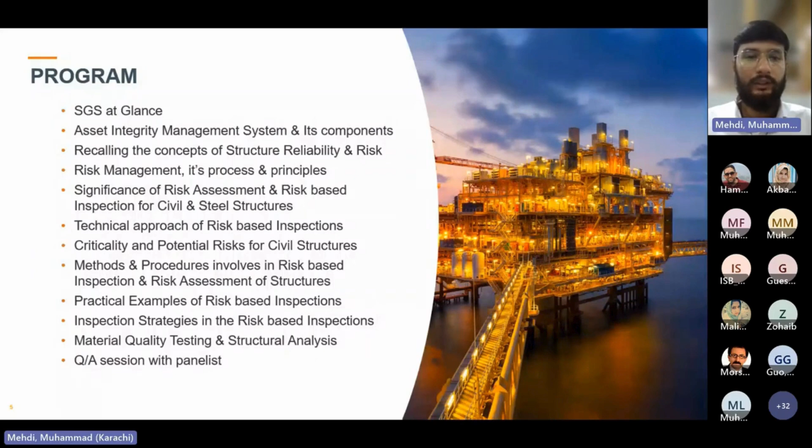and also some inspection strategies related to RBI. Then we will have a question and answer session.

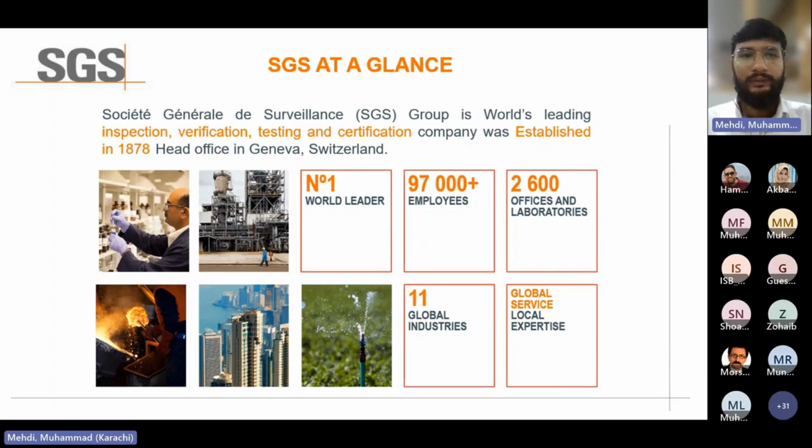Starting from SGS, I will discuss briefly: SGS is a group, and it's the world's leading inspection, verification, testing, and certification company, known as Société Générale de Surveillance. It was established in 1878 and is currently serving in more than 160 countries. If we talk about the timeline, it started in 1878, when SGS was founded in France. Then the business took off, and we opened new offices in France and different ports in 1879. In 1915, the headquarters was moved from Paris to Geneva, Switzerland.

Then in 1919, the name Société Générale de Surveillance was given to SGS. Then in 1955, we started inspecting industrial machines and goods-related services. In 1962, we established services for the oil and gas, chemical sectors, minerals industries, and government institutions. In the 70s, we started providing services in the area of environmental consultancy and remediation. In 1981, we increased our presence in different areas, and our sales also increased.

In 91, the booming economies in Asia fueled our growth, and we expanded our business to China as well. In 2000, our business grew further and our structure was further enhanced, and SGS came into a leading position in the inspection business. Today we have 96,000 employees, and across 2,600 offices and laboratories actively working in the world.

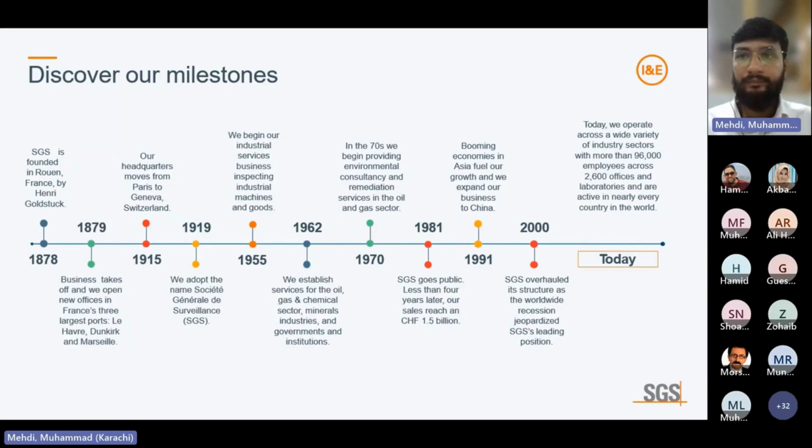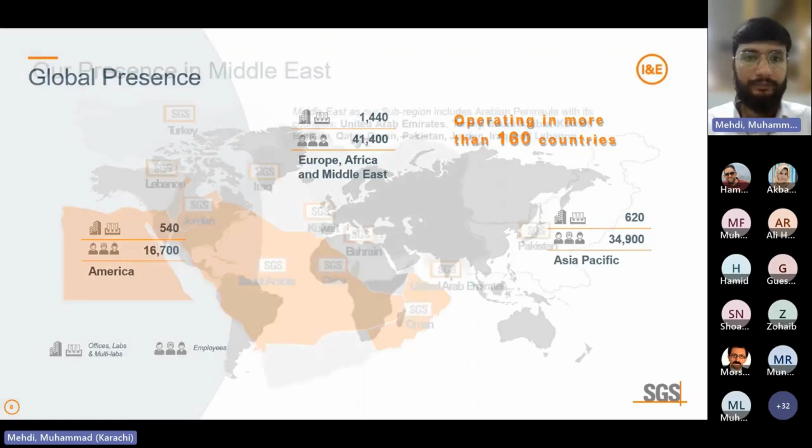So this is our presence worldwide, in the Americas, the Middle East and Asia Pacific, serving 160 countries. This is our presence in the Middle East in different countries like UAE, Turkey, Saudi Arabia, Kuwait, Lebanon, Jordan, Oman, and other countries.

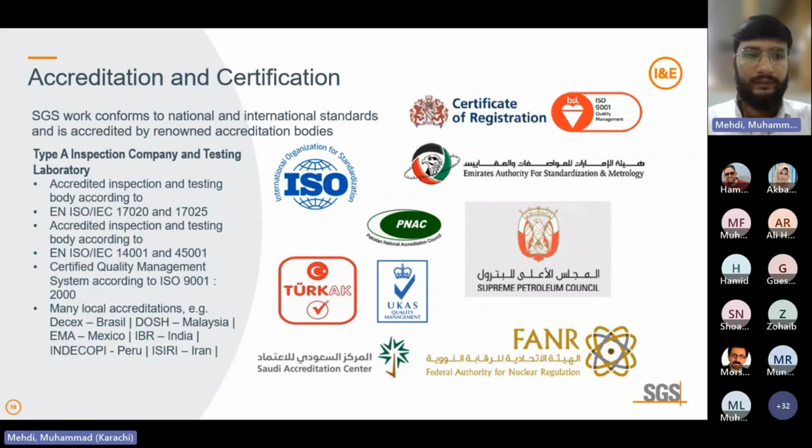So these are the accreditation certifications we have from the different certification bodies and organizations related to ISO and IEC standards. Similarly, we have memberships and certifications, and we are approved inspectors of API and NACE. Also, we have approvals from Aramco, and we have certifications from green building associations and similar bodies.

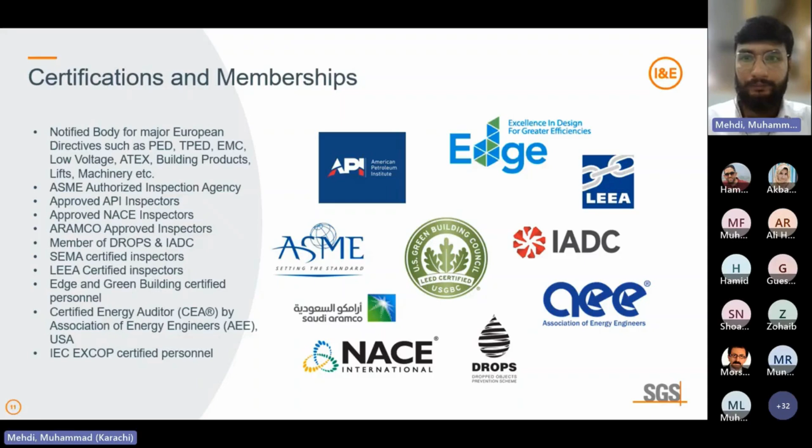So this was a brief introduction about SGS. Now, coming back to our topic, it is related to aging facilities and the risk-based inspection approach for civil and steel structures. We will go step by step, starting from the bigger picture, and then zoom into risk-based inspection. So we'll first discuss the asset integrity management system.

The asset integrity management system is basically a program, and particularly for civil and steel structures, it is a framework which ensures the reliability, safety, and availability of the structures throughout the entire life cycle. It identifies and assesses the safety, environmental, and financial risks associated with the operation of the structure. It also establishes and maintains suitable risk levels, and with this program we can further reduce the possible risk to our structures and assets.

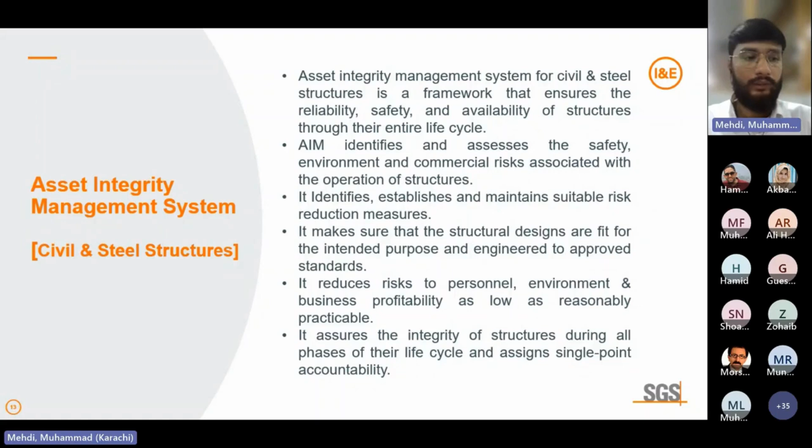The design we produce during structural engineering and the entire engineering phase, it also assures that the design is fit for purpose, engineered to approved standards and in compliance with international standards. It reduces the risk to persons and the environment, financial risk, and also the reputation of the company. So these are some of the risks, and with this program we can reduce them. It also shows the overall integrity of the structure during all phases of its life cycle,

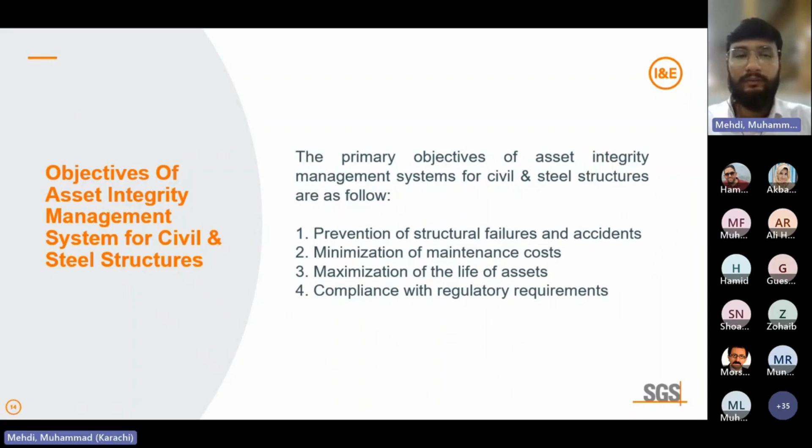and assigns responsibilities. So if we talk about the objective, it is to prevent the structure from failures and possible accidents. It can minimize the maintenance cost of the structures. With an asset integrity management system, if it is designed and developed efficiently, it can maximize the life of the asset, and it can also show compliance with regulatory requirements, codes and standards.

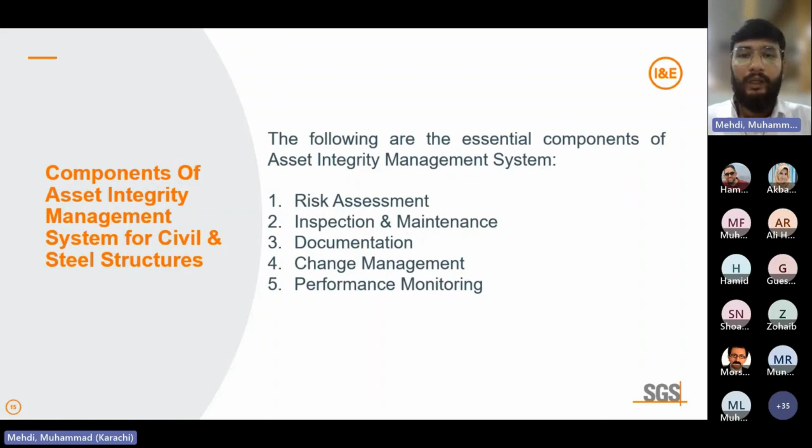So let's talk about the components of the asset integrity management system. They are five in number: first we have risk assessment, then inspection and maintenance, documentation, change management, and performance monitoring. We will discuss them one by one very briefly.

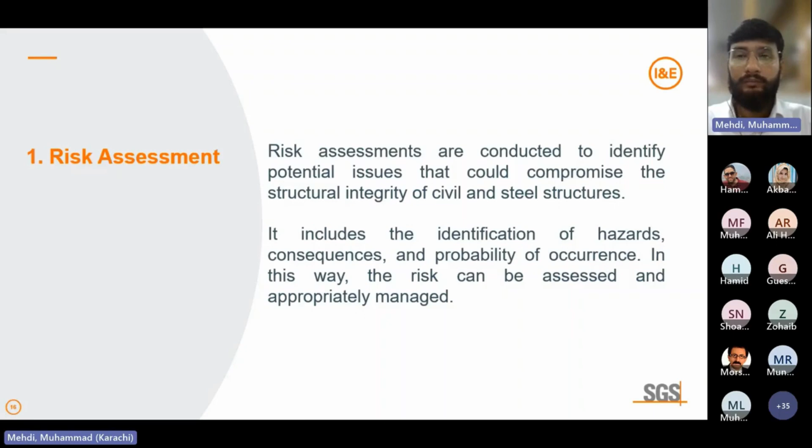Risk assessment is the activity and phase we conduct to identify potential issues that could compromise the structural integrity of civil and steel structures. It can be from various factors. It also includes the identification of potential hazards, the likelihood of these hazards, and the consequences. In this way the risk can be assessed, and if the risk is identified properly, we can manage it efficiently.

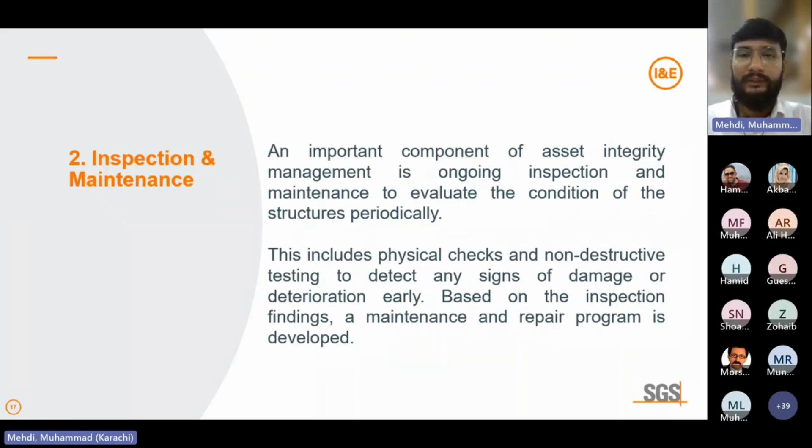The second component is inspection and maintenance, and it deals with the inspection of concrete and steel structures, such as bridges, buildings, and oil and gas structures like equipment foundations. Once we perform the inspection, on the basis of the observations we develop strategies to maintain and repair the structure and increase its life. The inspections include physical checks and non-destructive testing to detect any damage and deterioration, and we develop repair programs based on these observations.

So once we perform the inspections, we note down the observations taken during inspection and maintenance activities, and then repair is carried out on the civil and steel structure in the areas of weakness, whatever damage the steel or concrete structure has. If it is possible to develop a repair strategy which can enhance the life of the structure, we can develop certain types of repair strategies.

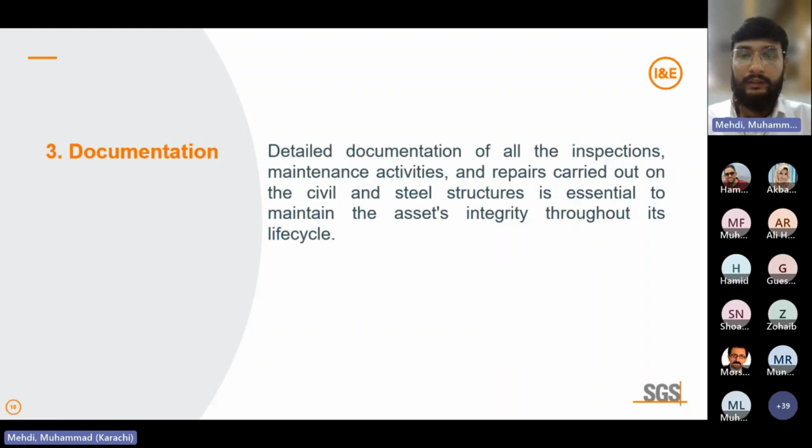The purpose is that the changes do not compromise the asset integrity. For example, if a building is designed for a certain load and solar panels are added on the roof, the building needs to be checked and assessed before incrementing the load. If it is not assessed and the integrity assessment of the structure is not performed, then there is a possible

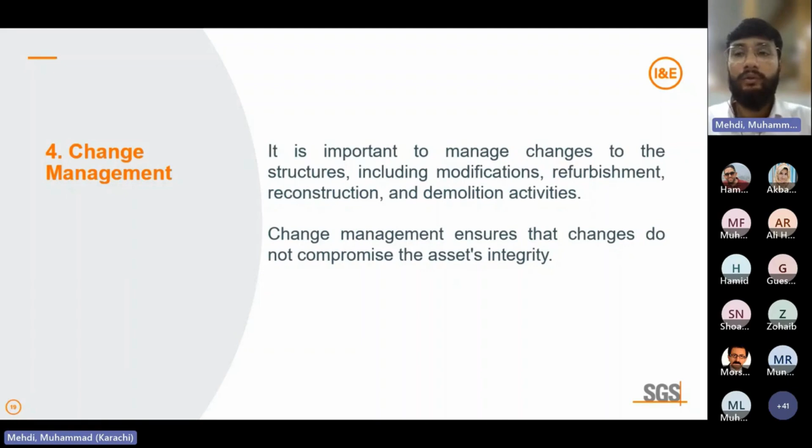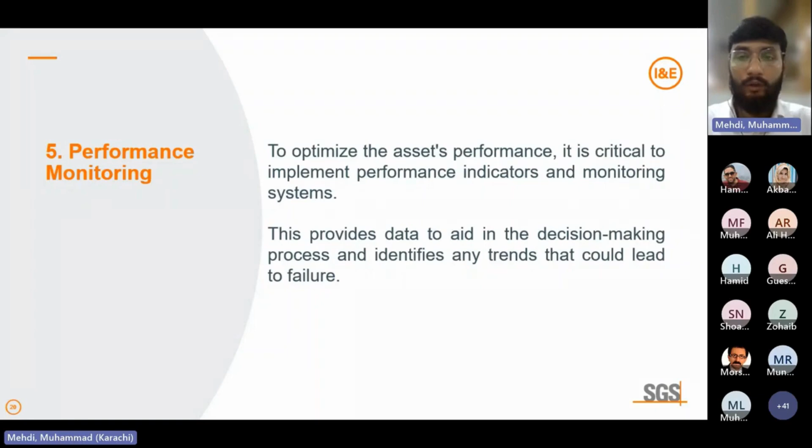So if there is a trend in which the damages are developing and cracks are emerging, then we can note it down, and our inspectors, on the basis of their periodic inspections, can share the document which helps us in decision making, or the owners to take the decision for the changes.

So overall, the asset integrity management system provides a structured approach to maintain a high level of reliability and safety of the civil and steel structure assets over their entire life cycle, and this is the goal of the overall asset integrity management system.

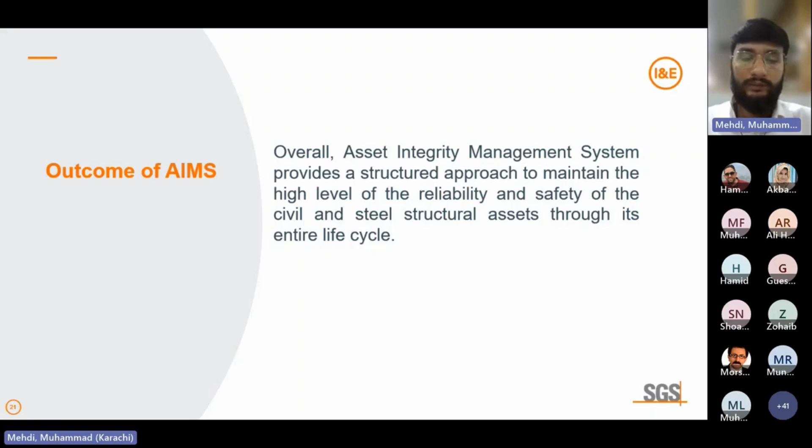So before moving towards the detailed discussion on risk assessment, I just want to recall the concept of reliability, which is about applying engineering theories to buildings and more generally structural analysis. Reliability is also used as a probabilistic measure of structural safety. The reliability of the structure can be defined as the complement of the probability of failure.

So if we have the probability of failure, which is dependent on the different types of failure modes and potential failures, which can be structural redundancies, design problems, construction errors, the number of inspections done, natural disasters, or fireworks, like these things. So whatever the potential failure, we can develop equations and on that basis calculate the probability of failure, and the reliability can be calculated as the complement of the failure.

So failure occurs usually when the stress exceeds the strength. So the measure of reliability is made by comparing a component's stress to its strength. The larger the gap between the stress and strength, the greater the reliability and the heavier the structure.

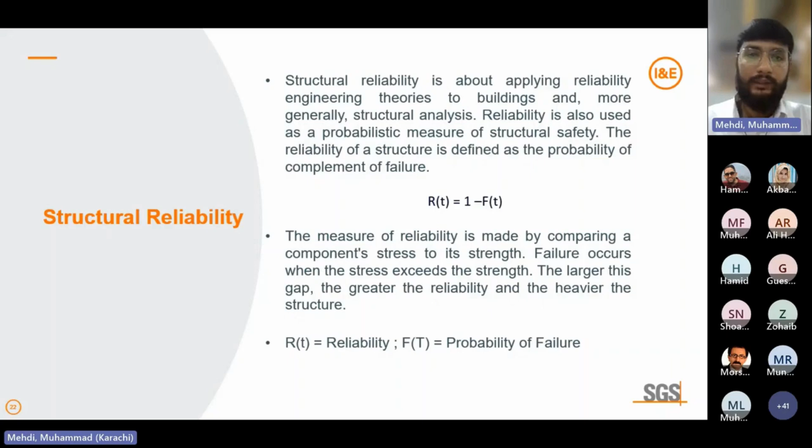So what is risk? Risk can be defined as the possibility of something bad happening, and risk involves uncertainty about the effects and implications of an activity on the future with respect to something that humans value, which can be health, well-being, wealth, property, or the environment.

The international standard definition of risk for common understanding is the effect of uncertainty on objectives. The understanding of risk, the methods of assessment and management, the description of risk, and even the definition of risk differ in different practice areas. For example, in engineering it is different. In business it has different concepts, and in economics and environment the risk definition is different.

Similarly, in information technology, health, insurance, safety, and security, risk has a somewhat different definition, but the overall concept is the possibility of something bad happening, and if risk is highlighted, we can manage to reduce the risk.

Structural risk assessment is by the probability of failure and its consequences. Failure can involve the whole building, bridge, or another infrastructure, or a part of it or any structural component like beams, columns, foundations. So we usually calculate the risk as the product of the probability of failure and the consequences.

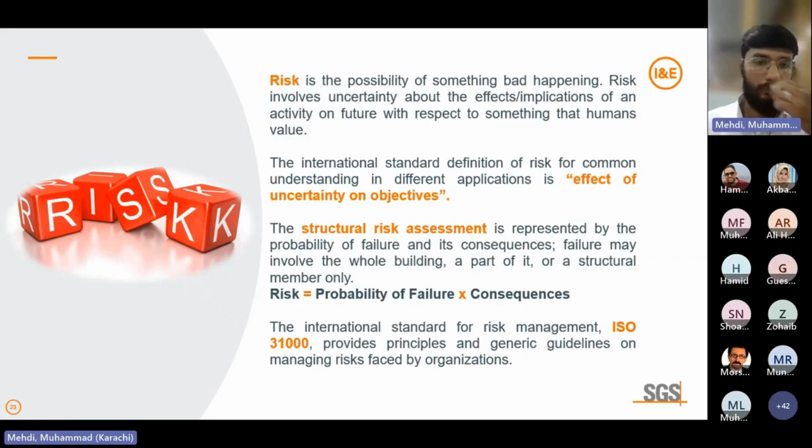The standard we use for risk management is ISO 31000, which provides the principles and guidelines. So risk management has different parameters and components in which we identify, evaluate, and control. We create awareness, we monitor, and then implement them.

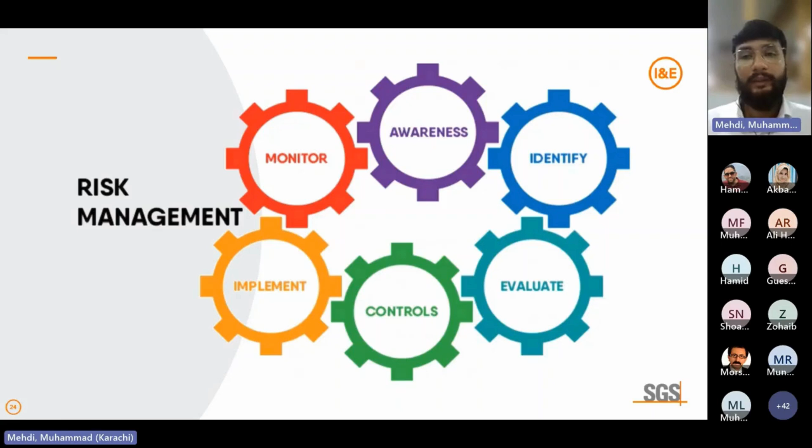So if we talk about risk management, it is the process of identifying, assessing and controlling the threats to any organization, the threats to any asset, for example, machines like equipment, electrical assets, mechanical assets, and in the civil category, the threat to any structure.

These risks stem from a variety of sources, including financial uncertainties, legal liabilities, technology issues, strategic management errors, and can be due to accidents and natural disasters. We will discuss them in detail in the upcoming slides. And these risks can affect the people, the finance, the environment, and the reputation of the organization.

The process involved in risk management has planning, identification, quantitative and qualitative analysis, response planning, monitoring, and control of the risk. As I discussed, the objective of risk management is to increase the probability and impact of the positive events and decrease the probability and impact of the negative events in the overall asset life cycle.

So in case of civil and steel structures, if we want to reduce, minimize and manage the risk, then our target is to improve the condition of the civil or steel structures by proper maintenance. And if this is done properly and from time to time on the basis of proactive maintenance, the structure can improve its life.

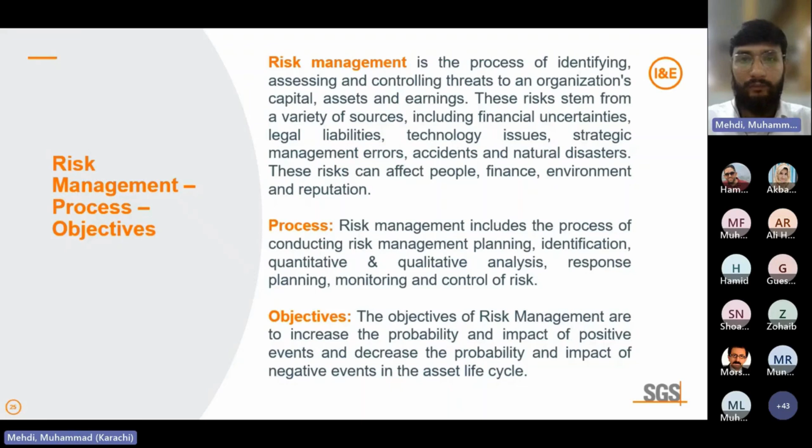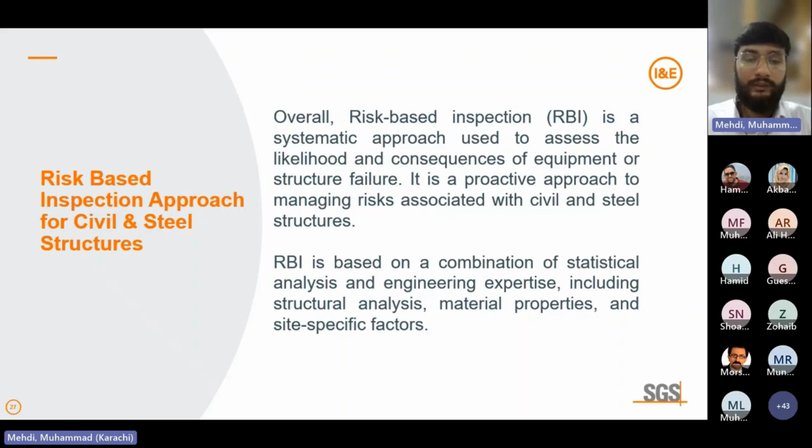So RBI, in short, is a systematic approach which is used to assess the likelihood and consequences of equipment or structural failure. If applied, we can manage the risk associated with civil and steel structures, and it involves a combination of statistical analysis and structural engineering expertise, including structural analysis. It involves understanding the mechanical and chemical material properties, and it also involves site-specific factors related to the construction.

So in case of civil and steel structures, RBI can be used to identify potential vulnerabilities which can be due to inadequate structural design, for example, the load taken for the design may not be suitable, or the building is designed for less load. Another factor is environmental, and the third one is construction issues.

So these are some potential vulnerabilities, and with the help of RBI, we can identify problems related to material degradation, cracks emerging in concrete structures and steel members due to extra loading or unplanned loads, and corrosion and fatigue in these structures.

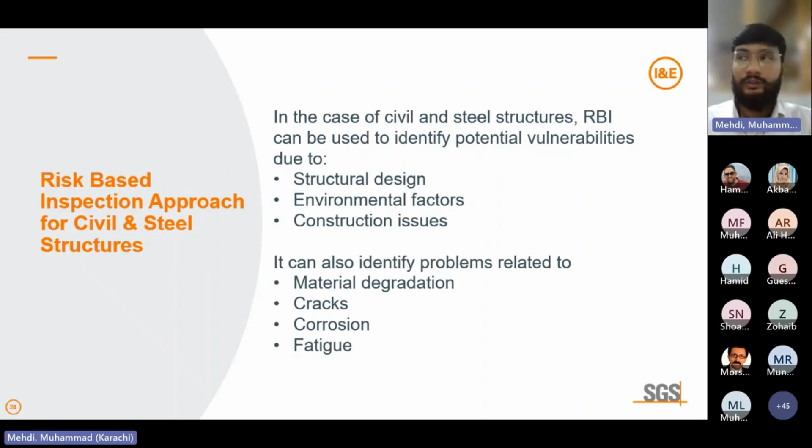And similarly, for example, the flood conditions. Like in Pakistan last year, the rainfall was very high, and due to which flood conditions developed in various regions. So it affects the substructure of the building, and if it is not properly addressed, we can lose the lives of people. We can have financial losses. We may have environmental issues, and also it affects the reputation of the organizations who are designing the building,

who are constructing the building. And in fact, if we talk about the industrial sector, for example, if you have a tank and it has a ring wall in the bottom, if the ring wall is not designed adequately to cater the load of the tank, if it is not properly monitored and maintained, then the possible effect of the degradation, the deterioration of the structure, and if corrosion emerges, it can affect the integrity of the structure, and ultimately it can cause a serious problem for the integrity of the tanks.

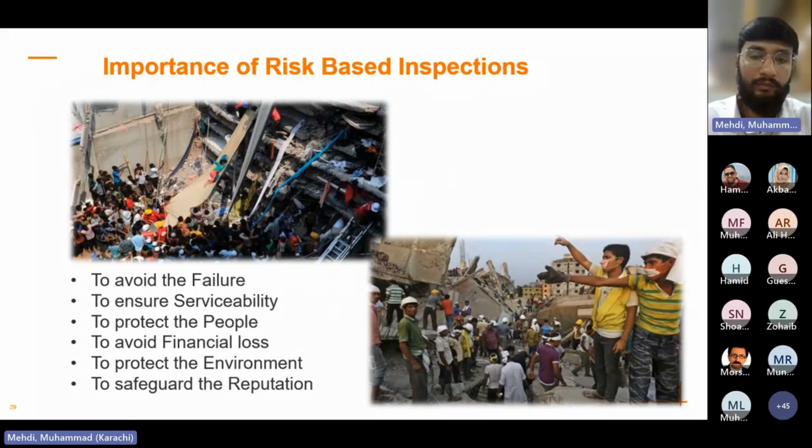And settlement issues arise, due to which there may be leakages of the oil, which can contaminate the soil at the bottom and will affect the environment. So these are some of the issues, and this is the importance of risk-based inspection: if you perform the inspections timely, then we can protect many lives and assets.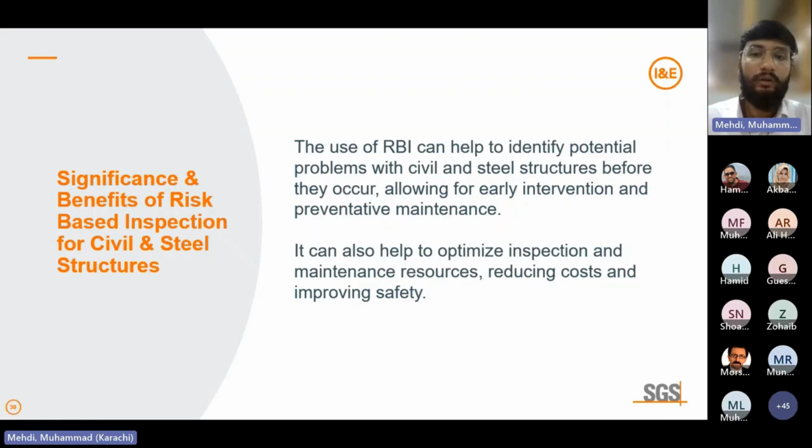So the target is to identify the potential problems before they occur, allowing for early interventions, and to develop a program for the prevention of these kinds of risks and threats. It can also help to optimize the inspection and maintenance resources, which will ultimately reduce the cost and improve the safety of the assets.

So if we relate the risk-based inspection approach to the maintenance plan, we have different techniques which can be used to define the inspection and maintenance plan for onshore and offshore structures. For example, in RBI, if we understand the whole structure and we know the whole lifetime of the structure, it is easy to predict the future requirements in maintenance.

Similarly, maintenance of existing old buildings and its relation with the cost of repair need to be considered during the maintenance plans, and the lifetime of the maintenance or the protection of the structure must be taken into consideration. So the required time to perform the maintenance must be discussed thoroughly.

We can say that to maintain existing old buildings and restore the structure to its original strength, the repair method of rehabilitation is also governed by the initial cost of the repair, the number of times the maintenance will be performed, and its cost over the remaining life of the structure. Usually, the lifetime of the maintenance or the protection of the structure must be taken into consideration. So the required time to perform the maintenance must be discussed thoroughly.

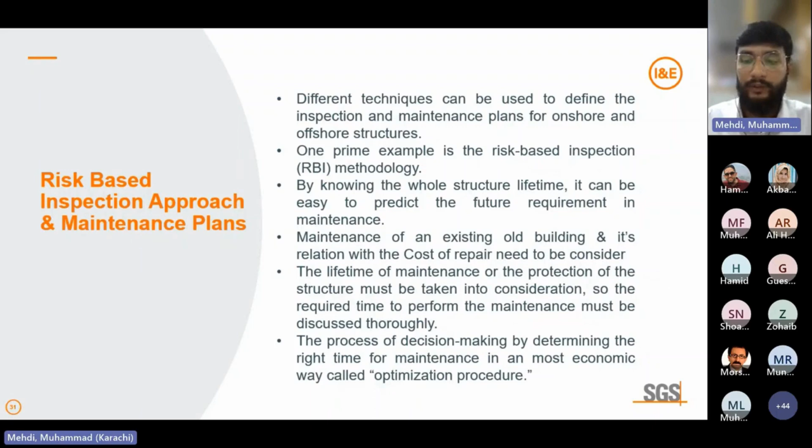So after that, this is the kind of graph in which I wanted to show and discuss the stages in the deterioration of concrete structures with respect to time. Usually, we design the structures for a certain life, like 50 years or 100 years for some specific structures, special structures. But if the structures are not properly maintained and monitored, the concrete deterioration really starts.

And with respect to time, the time comes when the chloride concentration or carbonation processes are started. Then after that, the third stage is when there is a start of corrosion in the rebars and the steel reinforcement of the structures. Because once cracks are developed, when there is a penetration of chloride content or the concrete cover is carbonated, then the spalling of concrete is started, and through these cracks, water and moisture go inside and can further deteriorate the concrete, as well as start corrosion of the steel

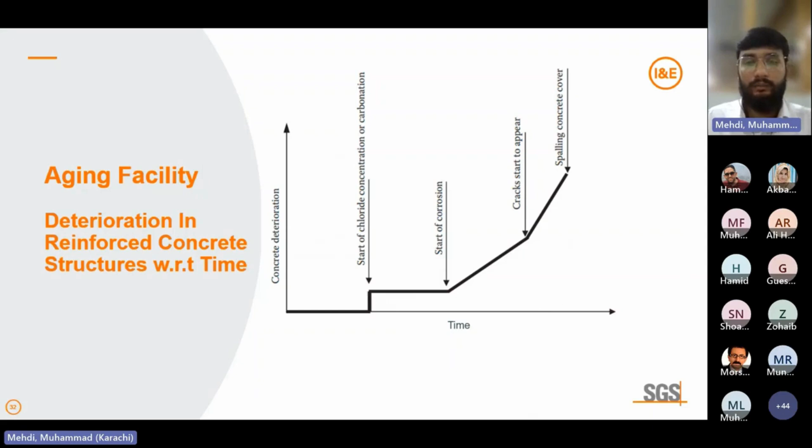reinforcement. And once this happens, the cracks further appear, and the width and thickness of the crack further increase, which results in the spalling of the concrete, and it starts complete deterioration. So similarly, if you talk about the reinforcement, you can see that without corrosion, the rebars have the nominal diameter. But when the corrosion starts, the degradation process starts, the material degrades due to moisture or oxidation, the material starts disintegrating, and it results in capacity loss in the reinforced concrete sections.

If we talk about the fundamentals of the design of any reinforced concrete member, the member's capacity is dependent on the cross-sectional dimensions of the concrete and steel area, and the material strength, concrete strength, and steel yield strength. In the case of uniform corrosion, as you can see in these figures, the total longitudinal reinforcement area can be expressed as a function of time, where T is the time, D is the diameter of the bar, N is the number of bars, Ti is the time of corrosion initiation, and Cr is the rate of

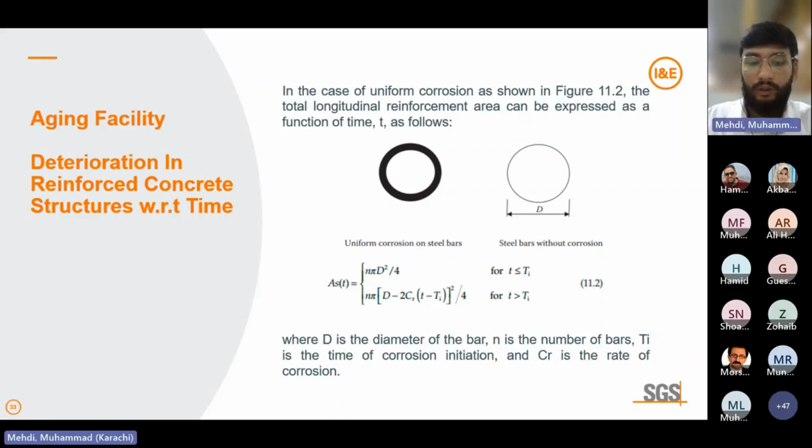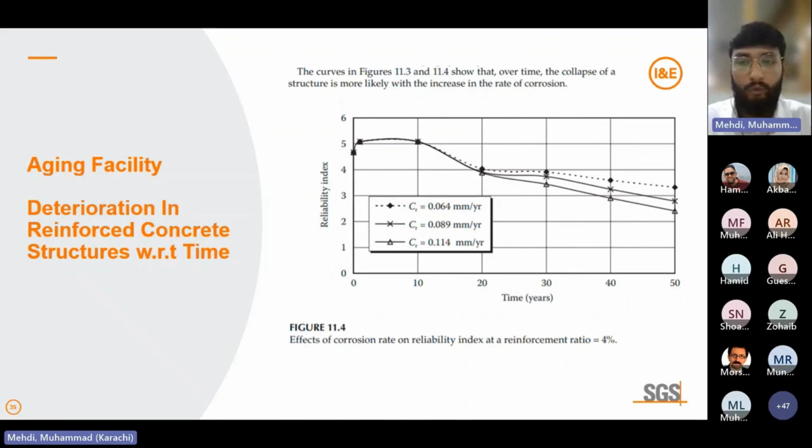But in the next slide, you can see that if the reinforcement ratio is increased to 4%, then from 0 to 10 years, the value of reliability is more than 4, in fact more than 5, which means the reliability is improved. But when it moves from 10 to 20 years, it reduces, and from 20 to 50 years, it reduces gradually, and it is not a constant curve. So in these cases, we understand that in case of higher steel ratios and lower corrosion rates, this period may increase to about 15 to 20 years.

Moreover, this study expects that in case of columns with eccentricity, the moments on the column will increase, so the design should increase the percentage of steel. In such cases, it is expected that the deterioration of a structure towards criticality will ensue after a couple of years in the cases of lower reinforcement steel ratio and very high corrosion rate. On the other hand, as in this graph, in the case of higher reinforcement ratio and lower corrosion rate, the maintenance will be due somewhere around 5 to 10 years.

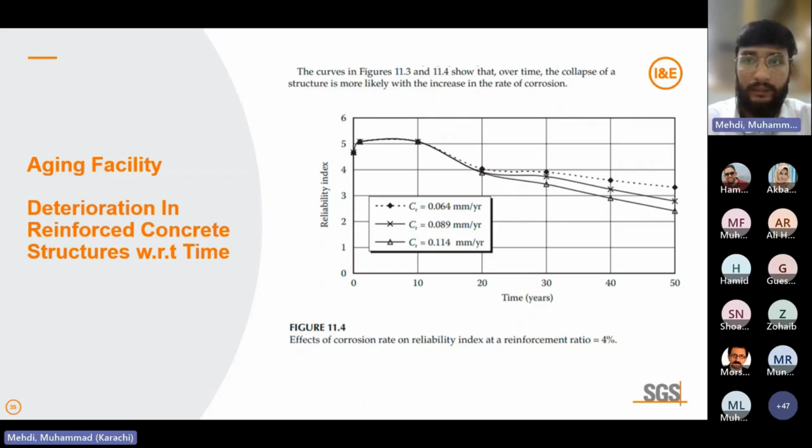So this is what we wanted to explain, that over time the collapse of a structure is more likely with the increase in the rate of corrosion. So these need to be considered when highlighting the risk.

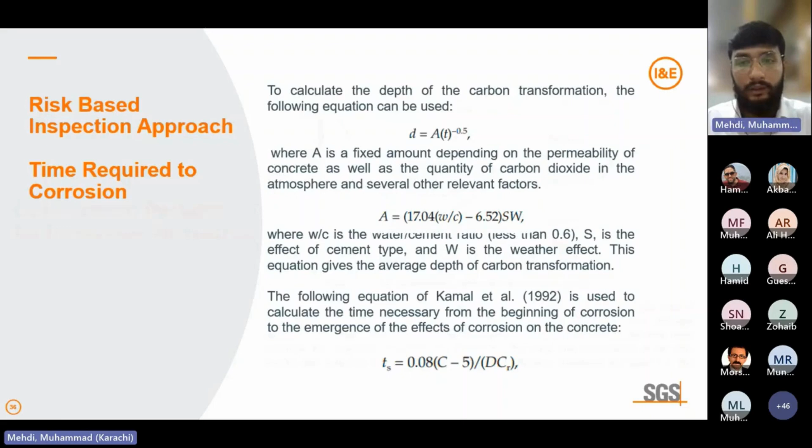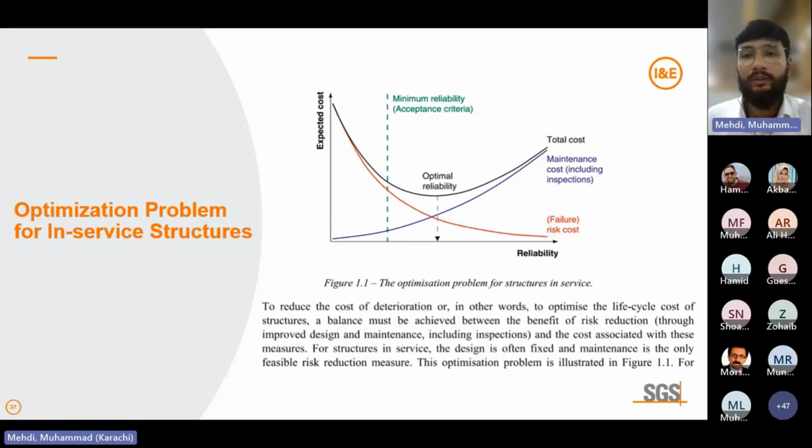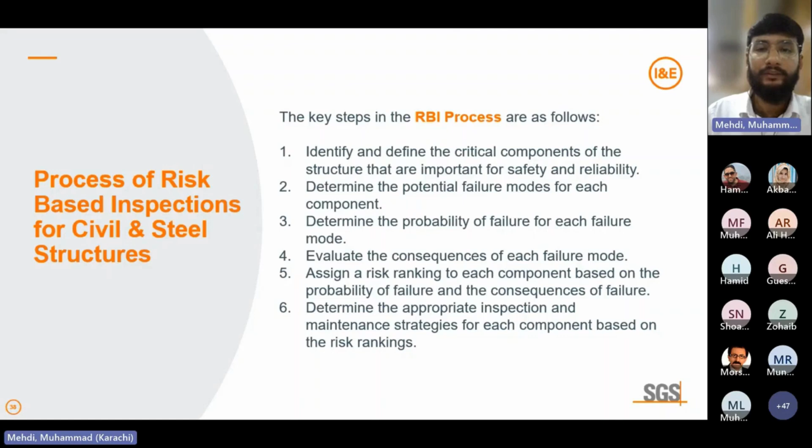of each failure mode. Then fifth is to assign a risk ranking to each component based on the probability of failure and the consequences of the failure. And the sixth is to determine the appropriate inspection and maintenance strategy for each component based on the risk ranking. So we quickly move on.

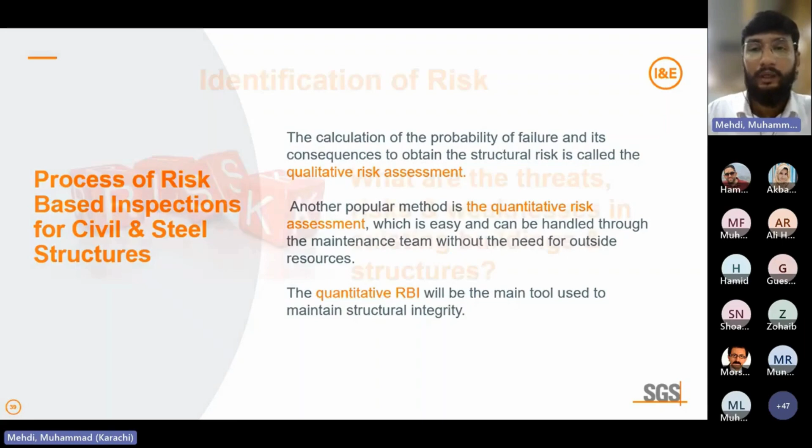The calculation of the probability of failure and its consequences to obtain the structural risk is usually called qualitative risk assessment, but we can also perform a quantitative risk assessment in which we calculate the numbers, and on the basis of these numbers, we can develop risk matrices. So one by one, we will discuss these processes involved.

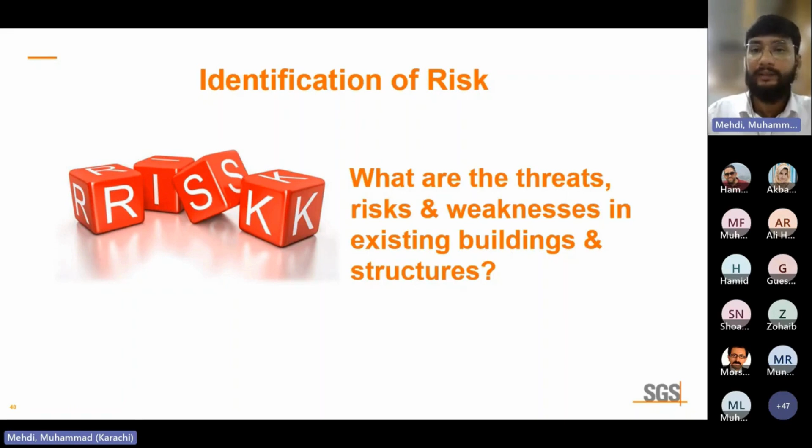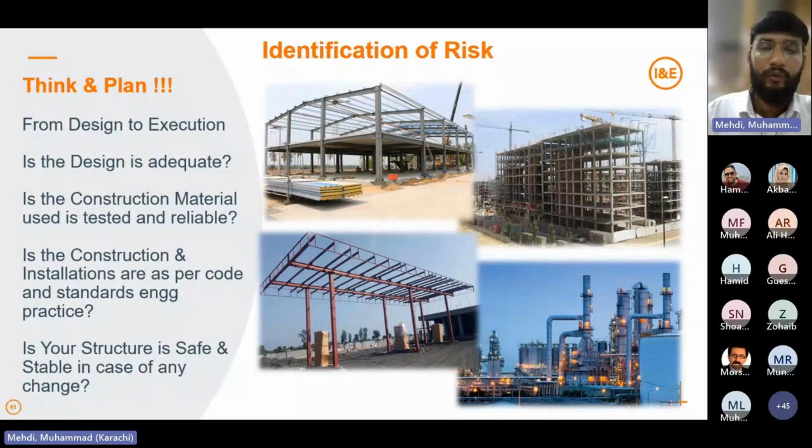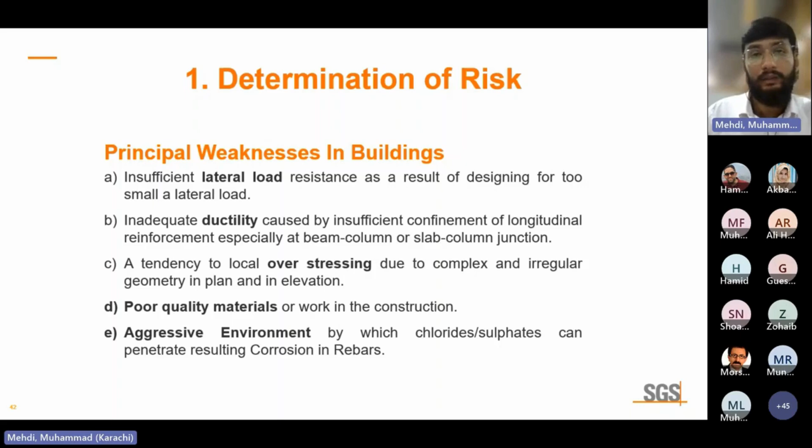There can be a tendency to local overstressing due to complex and irregular geometry in plans and elevations, poor quality material in the construction work, and one of the factors is aggressive environment due to chlorides and sulfates penetrating and driving the corrosion of the rebar.

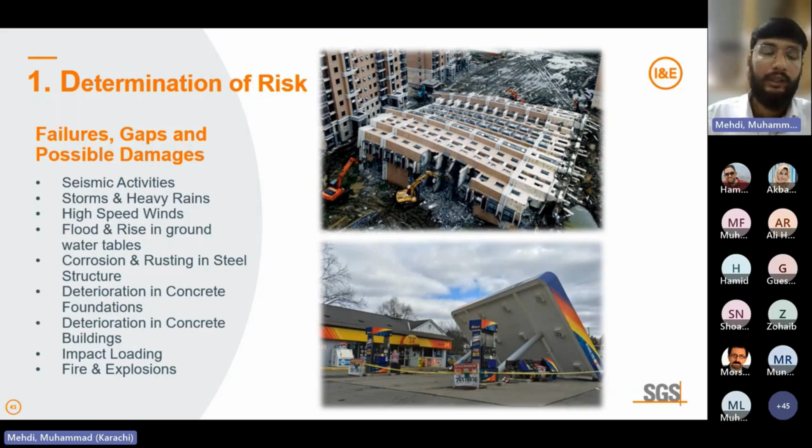So you can see the collapse of these buildings and the fuel retail stations. This happens because if the buildings are not designed adequately or they're not constructed properly, then they can be affected by the impact of the loads, seismic activities, the effect of storms and heavy rains, high speed winds, flood and rise in the groundwater tables, corrosion and rusting in the steel structures, deterioration in the concrete foundation, deterioration in the building, and impact loading, when heavy force in a short span of time affects the structure. It can collapse the structure, and fire, including in the industrial sectors, is very common.

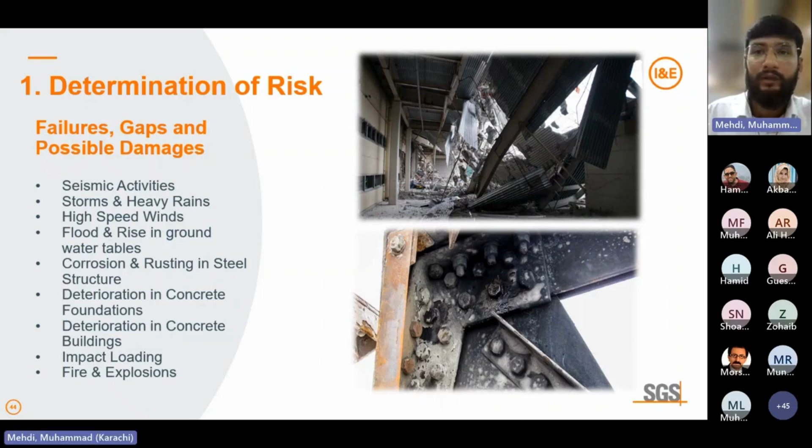You can see the impact of the fire in the steel structures as well when the structures are not properly constructed. Fireproofing can be performed here to minimize the risk of the fire, but as you see, it was not done. So that's the impact of the burning, and the impact load, as well as the effect of the wind loads, is very common in steel structures if they are not designed adequately.

And similarly, the effect of earthquakes and seismic activities for the oil and gas sectors, especially for the offshore structures, the structures under the sea, is very important to be monitored periodically to avoid the start of corrosion, and the CP system to control the corrosion needs to be monitored, especially.

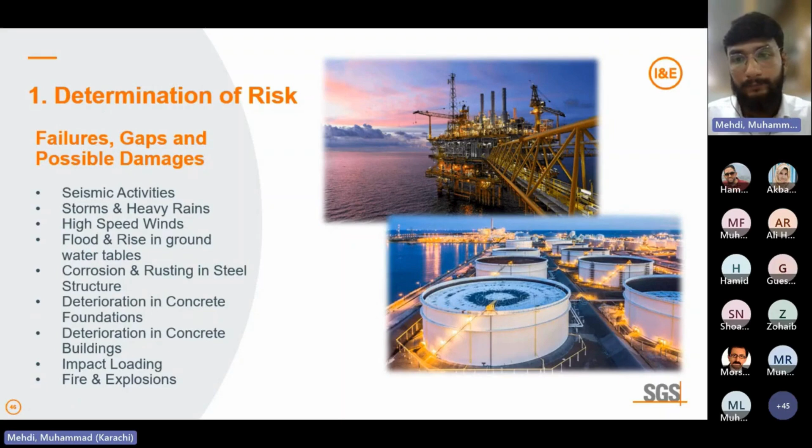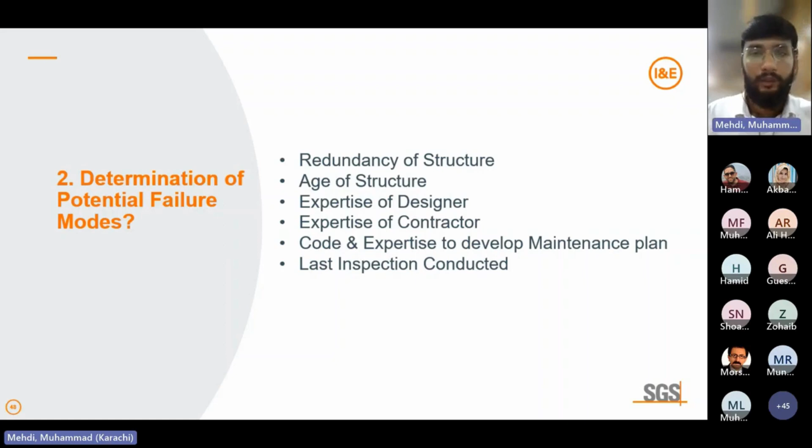Second is determination of the potential failure modes. It can be redundancy of the structure, age of the structure, the expertise of the designer, the expertise of the contractor, the code and expertise to develop a maintenance plan, and the last inspection conducted. So these are some potential failure modes which can be considered to determine the probability of failure.

Then, in order to calculate the consequence of failure, six different structures are taken as an example. The impact on the person, impact on the cost, impact on the environment, and impact on the reputation. These are again numbered in ranges from 1 to 10, and these are assigned as per expertise: what the consequences are, how much the person will be affected, how much it will cost when this particular structure is damaged.

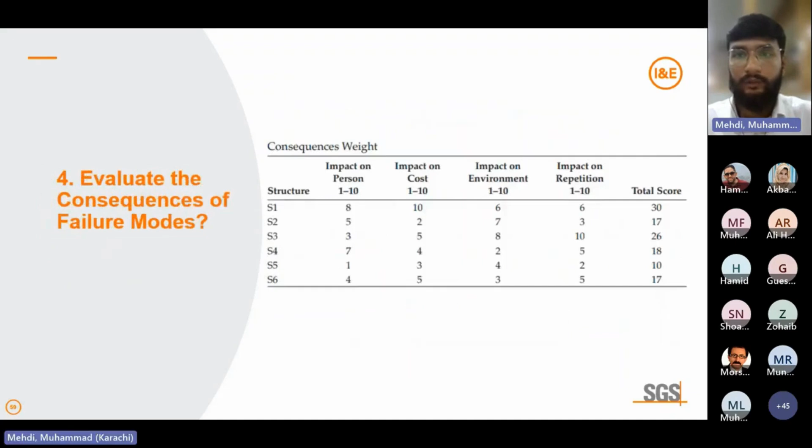Then we have an evaluation of the risk ranking based on probability and consequences. Again, remember that risk is the product of the probability and consequences. For all the structures, the probability of failure was calculated from the last table, and consequences from this table, and they are placed together in two different columns. By the product of probability of failure and consequences, we get the risk number. These numbers are very important because on the basis of them we can categorize them priority-wise.

Priority means we give high importance to the structure in the red category, then the yellow category, and least importance to the green category. Step by step, you perform the maintenance, and repair strategies are developed accordingly. So you can see here, this is an example.

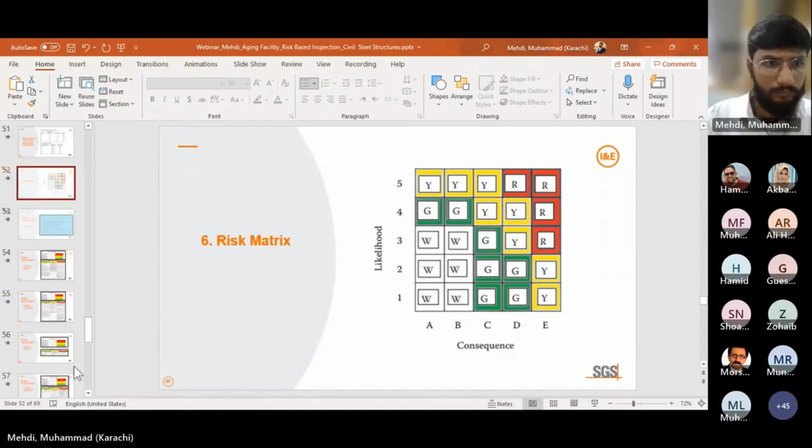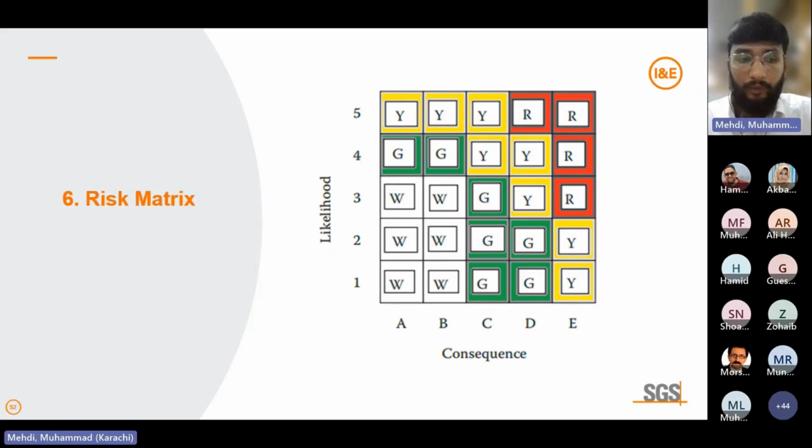After these calculations, you can develop a risk matrix in which on the bottom you have consequences, and on the vertical axis you have likelihood or probability of failure. You then categorize them and assign a particular color on the basis of priority. I'm sharing an example from the oil and gas sector, in which we have taken observations for fuel retail stations. There are observations related to the unavailability of, for example, an oily water separator, catch pits, boundary walls, canopy structures, and the thickness of the RC slab not being sufficient.

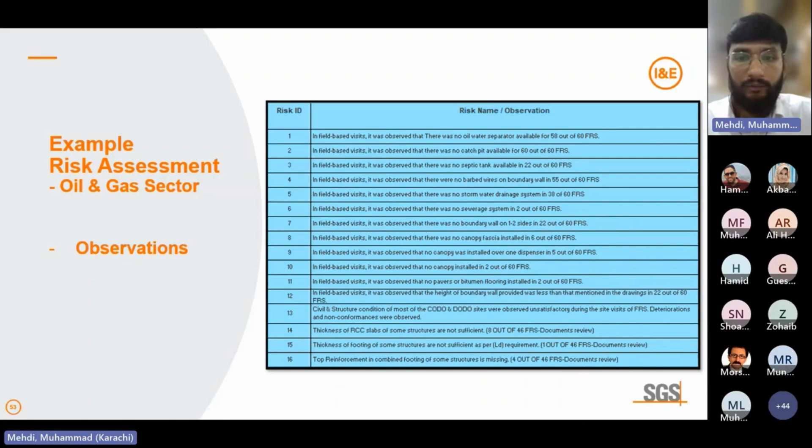After these observations, each observation was considered, and the likelihood and consequences were assigned. The likelihood deals with how likely this can happen. If it can happen repeatedly, we assign a 3. If there is a possibility to occur intermittently, it is a 2, with the yellow color, and if it is less likely, then it is a 1.

For the consequences on people, there were 3 different columns. Minor consequences are when people are affected and require first aid, not affecting work performance or the daily life activity of a person, and illness with reversible health effects such as food poisoning and dermatitis. If people are affected in this category, it is minor and a consequence of 1 is taken. Otherwise, if it affects performance in the longer term, such as absence from work for more than 5 days, then it is considered moderate.

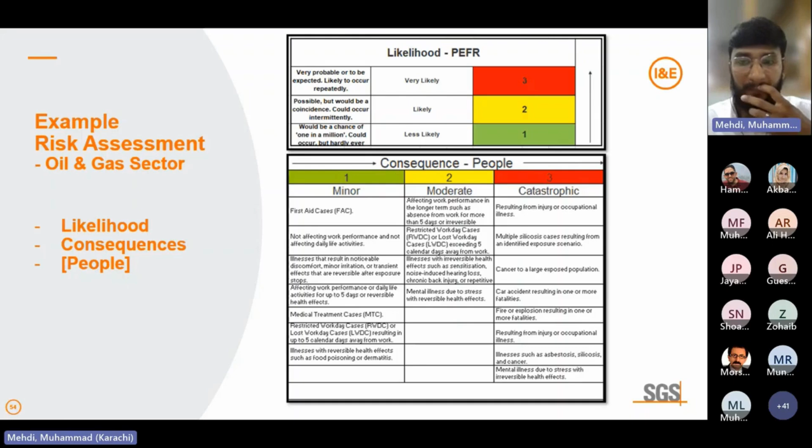And if it is resulting in injury or occupational illness, or a kind of car accident, or multiple, we can say, for example, cancer to a large exposed population. So these are some factors which are considered a catastrophe for the impact on the people.

Similarly, if we talk about the environment, if no environment impact is contained within the premises, then we have a minor. If a limited environment impact will persist, then we can take a moderate. For example, spill onto a non-impervious surface that requires removal and disposal of a large quantity of surface media. And if there is a severe environmental impact that requires extensive measures to restore use of the environment, then it will be taken as catastrophic.

For example, if the on-site groundwater is contaminated, for example, in case of the oil and gas sector, in terminals and depots, if the oil tanks and the vertical tanks are leaked, and if the dike is not constructed properly, and if this is natural ground, and if there is a nearby water body, then it can affect the water body as well. So this will be considered catastrophic.

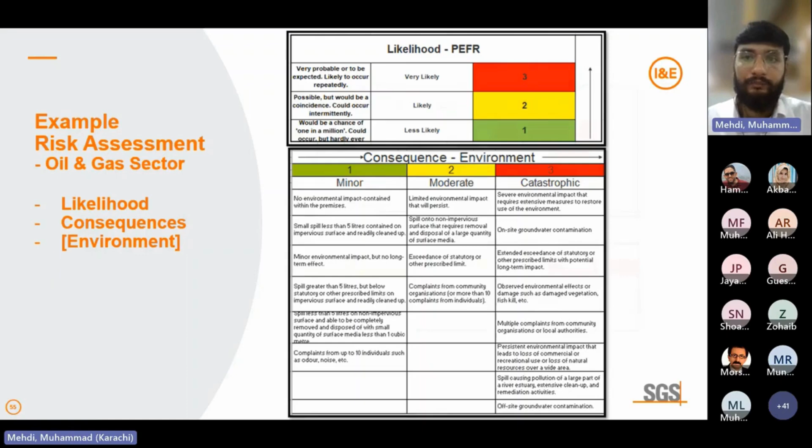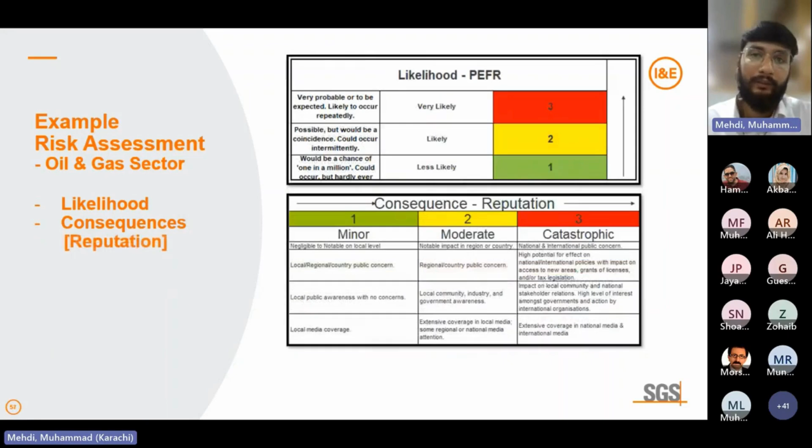If the damage of the asset is negligible and it is at local level, local media coverage, no public awareness or concern, then it can be taken as a minor. But if there is extensive coverage in national and international media, for example, there are casualties of people, or there was extensive damage to the infrastructure, then it can be taken as catastrophic, because it will affect the reputation of the organization, or maybe it can cancel the license of the organization if the damage is so high. So these are a kind of consequences.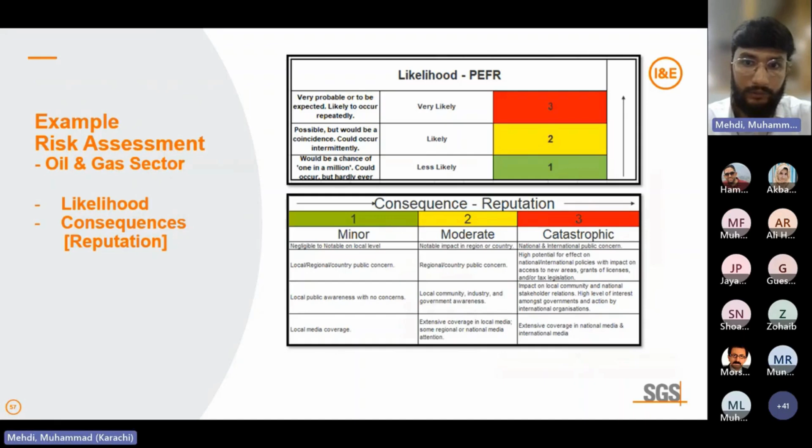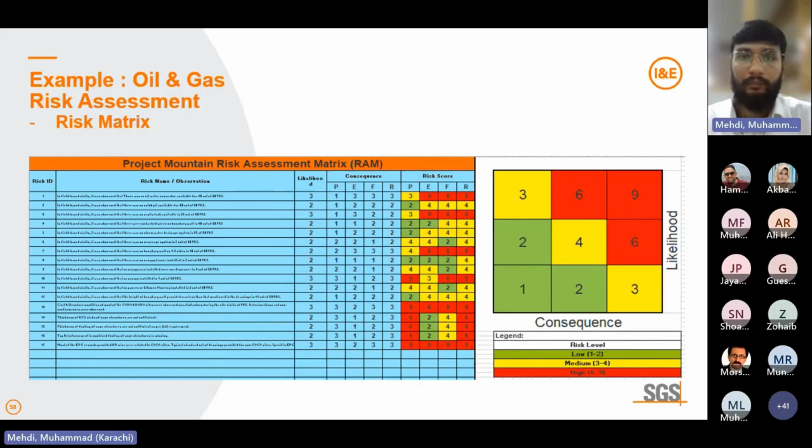So after this risk matrix, we have 3 to 4 slides remaining, in which we will be discussing the inspection and maintenance strategies. So the decision-making methods of an engineering project have been the focus of numerous studies in terms of their economic and financial importance to the cost of the project. Because any wrong decision, any false assumption could result in spending a huge amount of money to further reverse the consequence and effect of this damage.

So some studies have used decision trees to determine the appropriate time for the repair, particularly in some cases of infrastructure bridges, that required periodic inspections. When performing the maintenance plan strategy based on the cost, we must consider all the factors affecting the corrosion in general and other factors affecting structural durability and reliability.

For example, any method upon which a decision is based should define the time for regular maintenance and inspection, such as 10 years, 15 years, or 20 years. This decision is made first and foremost through the identification of the least expensive option. So this is the main way forward, that the decision is made first and foremost through the identification of the least expensive option.

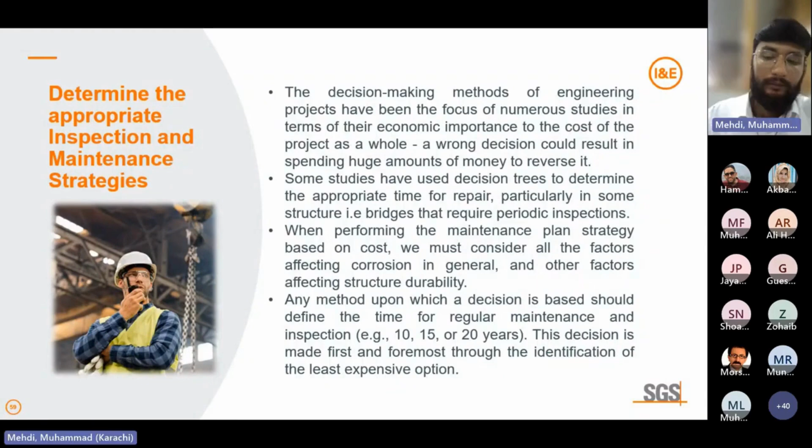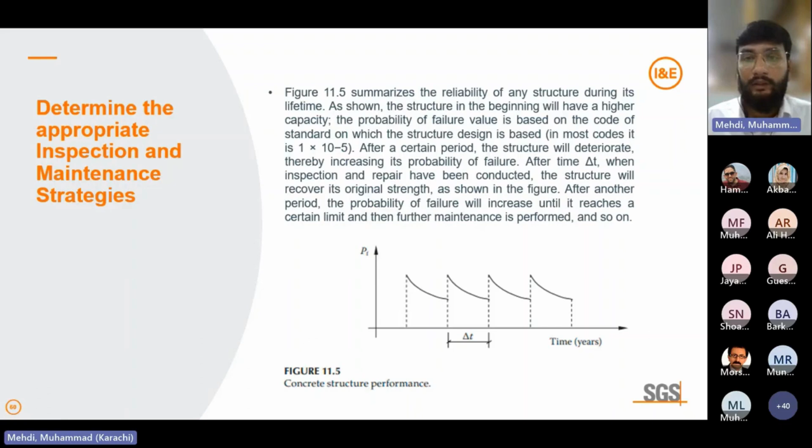So if the periodic maintenance inspections and regular repair and maintenance are performed efficiently as per the maintenance plan, and strategies are developed efficiently and implemented effectively, then the reliability of the structure, or the civil buildings, or whatever asset you have, will increase throughout its life cycle, and it will give you better options for the rest of the operations.

So similarly, there are some parameters in which you can see that inspection itself cannot only improve the reliability. This is another aspect. It is accompanied by a corrective action in the event that a defect is discovered. Several policies and strategies are used widely for the concrete structures. They should include monitoring until the crack depth reaches a certain proportion of the material thickness, and then repairing them; immediately repairing upon detection of an indication of damage; third, repairing at a fixed time, for example, one year after detection of an indication of damage; and repairing as new, for example, repairing the welding in the case of a steel structure.

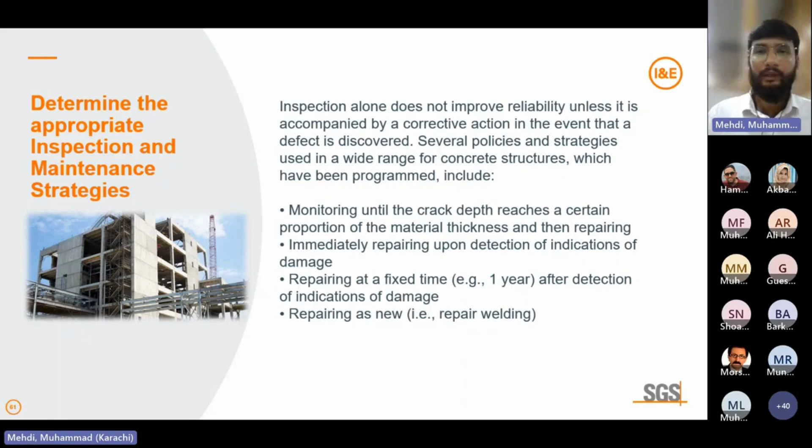These are some criteria for all kinds of corrective actions, but depending upon the level of the damage or deterioration you observe in your structure, you can plan the repairing program accordingly. For example, if there is a large, severe crack and there is a chance of collapse of the structure, then this is highly alarming, so you need to take decisions accordingly. But if there is a moderate level crack that you can repair, then you should apply the repairing strategies in a short span of time. If there are minor level cracks, then you can take some time to repair them and consider them less important.

So it is good to develop a program in which you have a specific interval for the inspection of your civil and structural assets like foundations, columns, beams, and slabs. For example, you can see in the next slide.

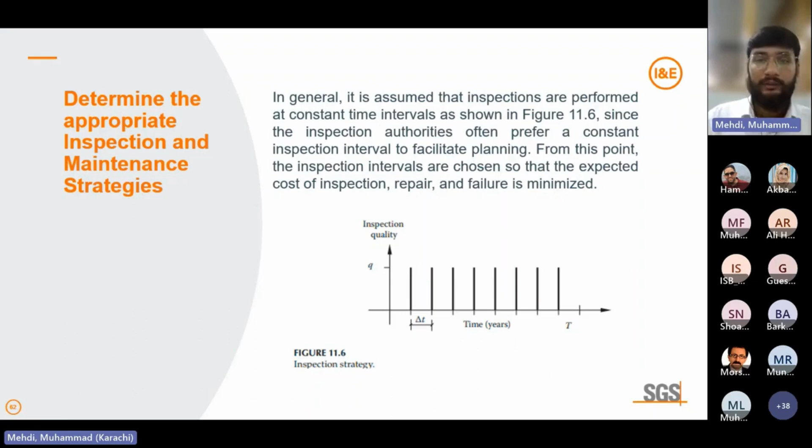Although most concrete structure inspection techniques are visual or involve various kinds of non-destructive techniques, which will be discussed in the upcoming slide, the ability to detect damage depends on the quality of the inspection performed. So a qualified inspector is very important: whether he is certified and qualified to perform this inspection, because the lives of people, finance, environment, and the reputation of the organization depend upon the observations he or she takes from the site. So experience is very important. A higher quality inspection method will provide a more dependable damage assessment, and no repair will be made unless the damage is detected.

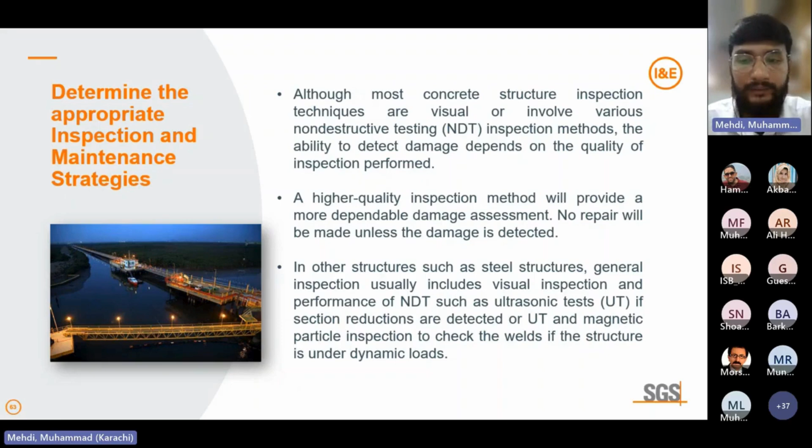In the case of other structures such as steel structures, general inspections usually include visual inspection, and non-destructive techniques may include magnetic particle inspection (MPI), DPT, UT, radiography, and hardness testing. And there is some on-site chemical testing like PMI.

So these are some tasks usually performed in the steel structure. For the offshore structures, like we have different rigs for the oil and gas, and then we have jetties and trestle bridges. So we really perform the inspections of these kind of structures. SGS has expertise in performing the inspections of these structures.

These type of inspections will be performed on the top side, similar to steel structures onshore. But you can see the jacket of the platform must undergo underwater inspection. And the underwater inspection, which incurs high cost, can be performed by divers, who should be expert in taking the observations, pictures and videos, and also by remotely operated vehicles like ROVs.

ROVs or divers perform visual inspection to detect the flooded members, define the location of the damaged or bent members. They define the thickness of the marine growth around the piles, and take the cathodic protection readings as well underwater. In case of offshore structures, it is very important because the piles are penetrated deeply under the seabed, but the area in between the sea surface and the seabed is highly critical because the effect of the corrosion is very high if the CP systems and other remedies are not properly addressed.

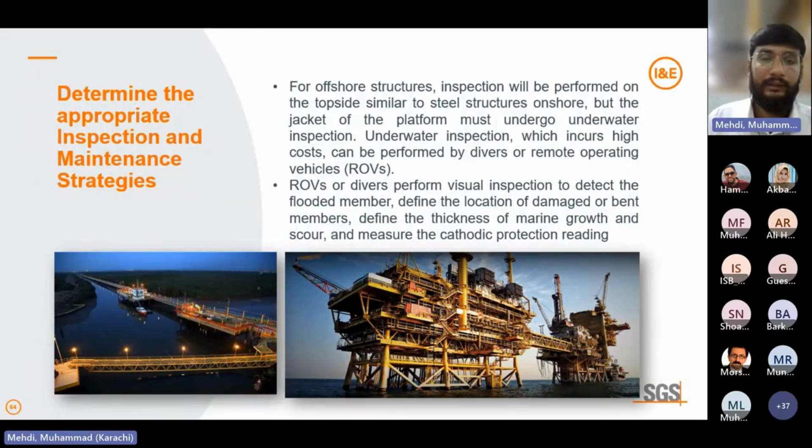So appropriate inspections and maintenance strategies need to be defined to inspect them, whether a boat should be used to check the condition. There are right now some technologies that SGS is using. For example, we are using the drone for the inspection of the above-seawater structures right now in Karachi to detect the damages closely. And with the help of the drones, we minimize the risk to our inspectors as well. So this is the way forward with the help of digitalization and innovation. We can use the technology to get better results on the damages and possible risks to your structures.

So these are visual inspections performed on the basis of ISO 13822, which gives guidelines about the inspections, and ACI 201.1R for the concrete structures, and American Institute of Steel Construction guidelines. And there are definitely other standards which can be used for the inspection of the structures. The non-destructive and destructive techniques we usually use for the concrete structures and the steel structures.

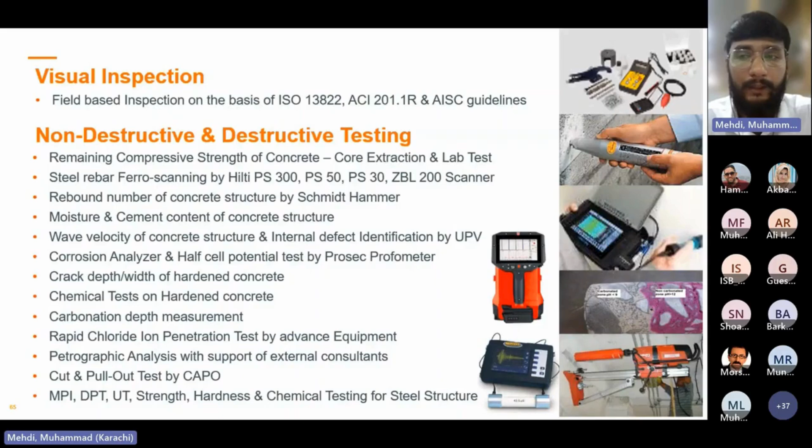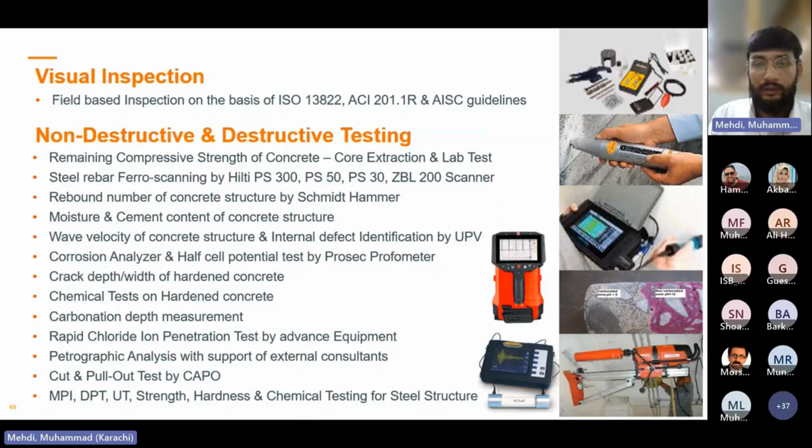You can see the list of these techniques, which have ferro scanning, strength, Schmidt hammer testing, the corrosion analyzer. We have chemical testing for the hardened concrete. Then for the steel structures, we have MPI, DPT, UT, hardness, and chemical testing. These are destructive and non-destructive tests to check the condition and the quality of the material, further to calculate the risk and probability of failure.

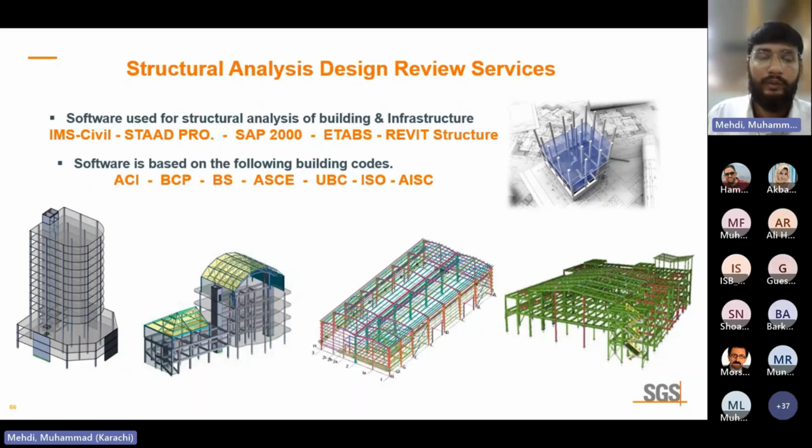So these are the software and codes and standards which can be used. For example, IMS Civil is used to perform the structural integrity assessment. Then STAAD, SAP2000, ETABS, and Revit Structure are used to analyze and model the steel structures and concrete structures, and to check the behavior of the structure by incorporating the existing condition of the material, and to predict the behavior of a structure on the basis of the load.

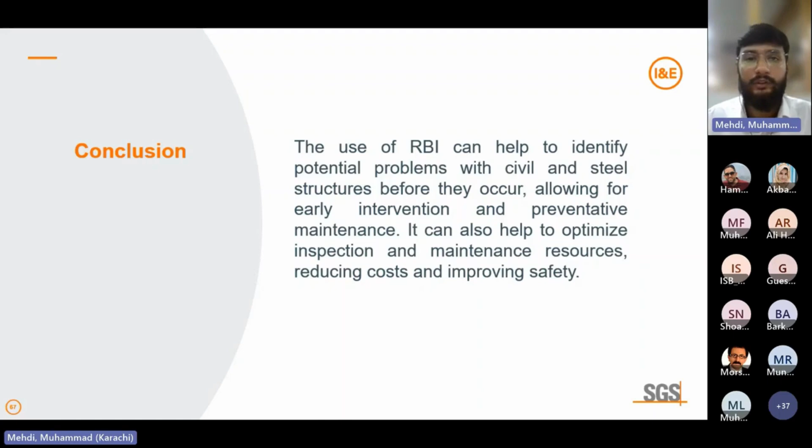So conclusively, we discussed that the risk-based inspection approach will help to identify the potential problems with civil and steel structures before they occur, and will allow for early intervention and preventive maintenance. It can also help to optimize the inspection and maintenance resources, to develop the best strategies for repair and maintenance, and it will definitely reduce the cost, optimize these systems, and improve the safety of civil and steel structural assets. So this is all about the risk-based inspection approach.